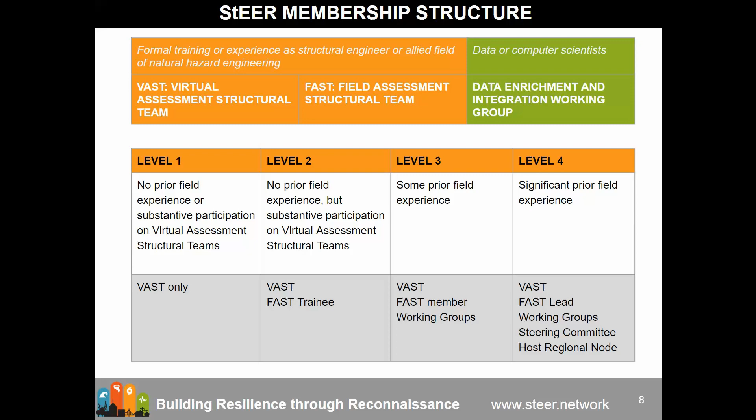Now, to help these individuals operating at the various levels - and our focus in this webinar is on the field assessment structural teams, which are primarily level 3 and 4 STEER members with an occasional level 2 as a trainee.

What we've done is create a STEER Google Drive. This is a type of shared drive in the Google context. You'll see it in your Google Drive on the left-hand side - there'll be a list of folder structures, and you'll see one called shared drives. This is distinctive from 'shared with me.' Look for shared drives, and under that you'll find the STEER members drive that you've all been added to, if you're a STEER member.

STEER members have all been asked to review the member guidelines - that's our first and primary guiding document. If you're going to be deploying in a field assessment structural team, we've also circulated and archived in this drive the Field Assessment Structural Team Handbook. We encourage everyone to take a look at that handbook and familiarize themselves with it.

We, for example, provided all of you with a badge upon enrollment that can be used as a credential. We have an access letter that can help you secure access to restricted areas during your deployment. We ask that every FAST submit a daily summary each night of their activities, so we have a template for that. We also have the FAA request form for those engaging in UAVs during their mission.

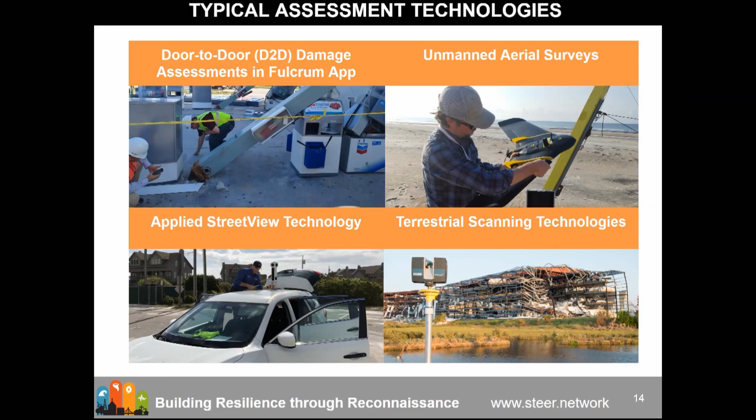So with that, I will pass it off to David, and he will go into further detail on several other of these data acquisition equipment. All right, thank you.

So now let's get into some of the details here of practically what this actually looks like when we deploy. I'm going to focus here mostly on the door-to-door assessments, because that still is the core of much of what we do in these deployments.

And so it begins with a data collection strategy. How do we decide, particularly with an event like a hurricane that impacts a large area, where we are actually going to deploy? When you think about it, we really only are able to sample a very small part of what is actually impacted, so it's critical that we collect what we focus on as representative samples.

We are not here to damage hunt or simply find the worst damage we can see. We want to take a scientific approach and take representative samples across both the hazard intensity gradient, but also capture a representative sample of different structure types - new versus old construction - to broadly characterize structural performance. This is not a hypothesis-driven approach; we're trying to broadly characterize performance, not just damage.

We do this, for example, in this case for Hurricane Florence. As it was coming ashore, after it was coming ashore, we're identifying these target areas for UAV deployment, as well as door-to-door assessments and other technologies.

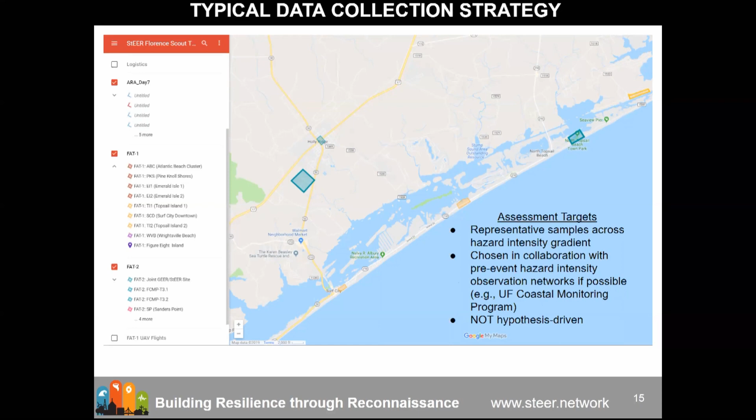Once we selected a site, we use what we typically call a cluster-based sampling technique, where the cluster may be a neighborhood, a transect through a tornado path, anything like that. And we use a redundant data collection strategy, meaning we typically try to have more than one technology available at a given site.

For example, as you see laid out here, this is in Hurricane Michael. For this neighborhood, which was a mix of newer and older homes, we were doing door-to-door assessments, as you can see with the individual markers, forensically investigating these individual structures, spending time capturing the details that we'll go over in just a little bit.

But then we were also using the UAV to capture aerial and oblique imagery from all different angles, and we also used the street view camera to go up and down these streets to capture essentially the complete ground view as much as possible from the road. The whole idea here is that we want to allow you, the door-to-door teams on the ground with expertise in structures and hazards, to really do what you do best.

That allows us to focus on forensic assessments and not have to worry about collecting every detail of every single building, but instead rely upon the street view camera and UAV data to capture some of the context for the more detailed assessments we do. We typically sample every third or so structure within a given cluster.

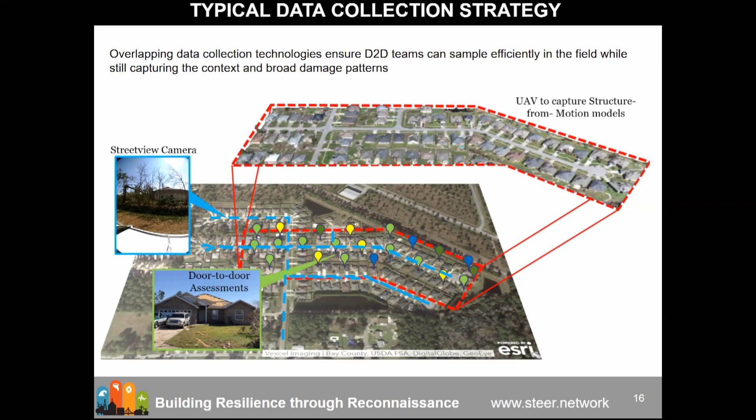That brings us to how we actually conduct these door-to-door assessments. We currently use the FULCRUM app, which is a platform consisting of both a smartphone app and a web-based platform. Within this platform we're able to develop multiple apps. Just to be clear on terminology, there's a FULCRUM app you download to your phone, and hopefully you've all got an invite and been able to do that. But within that app, there are also multiple separate apps or assessment forms we've built out and customized for our application. You'll see on the right a couple of these.

Right now for windstorms, our main form is the StEER Building US Windstorm assessment. This is focused on building performance in the US, including structural systems and envelopes, and impacts of wind, surge, rainwater, etc. We also have a non-building structure assessment form that's more general, capturing things like dams, bridges, or power infrastructure. We're still a work in progress building out additional apps. The idea is that it's not possible to capture every combination of every building and structure, but we want to provide standardized forms that capture the primary fields and characteristics of common building types and non-building structure types, to guide you in the assessment process and make sure we're collecting complete and informed data sets.

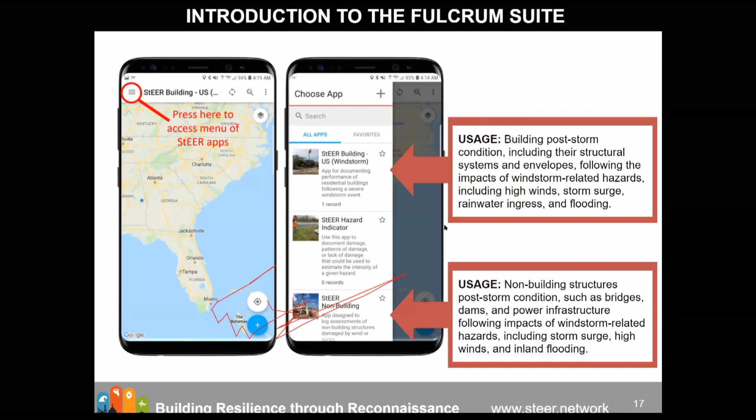Let's see, I just gave you control, so try to click—this might make it easier for you. Is it working? It looks like I can. Oh, you can draw only? All right, then I'll continue. I'll abort control. Okay, down there where all the red squiggly lines are. Yes exactly, let me move us forward. Thank you, that's still there. Don't know how to get rid of that. I'm not seeing it either, so we may just have to continue on for now. I'll let you work on that in the background, I'll just keep going.

So there you go. Once you create a record, you get a series of fields that look somewhat like this. The very first thing I want to point out is that one of the most important parts of creating the record is making sure it's geolocated correctly. This makes the VAST member's job infinitely easier if you geolocate the record properly.

By default in FULCRUM, when you create a new record, it assigns a location to that record right where you're standing. But if you're standing in the road, it's somewhat ambiguous which structure you're actually referring to. So what you need to do when you create a record is go to the crosshairs icon—either at the top in Android or at the bottom in Apple—and that brings up a map like shown on the right. You can scroll that map so the crosshairs are located directly over the structure you are investigating.

And that will help also in geocoding the address that goes along with it as well. Okay, so that's the first step. Once you've done that, it brings up a series of fields that you're prompted to fill out.

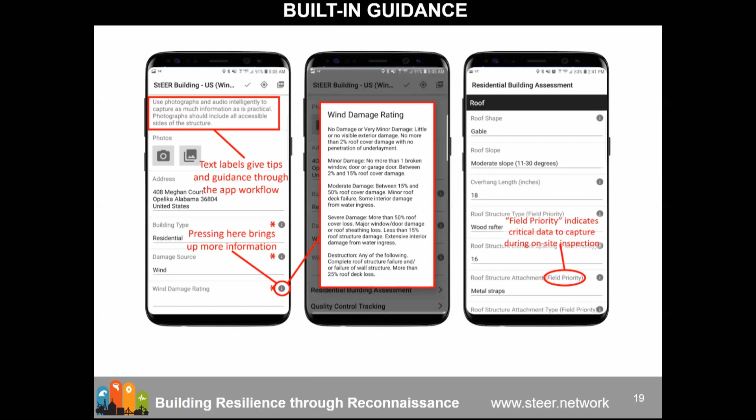Go ahead and next. All right, let me give you a general overview of the StEER non-building U.S. Windstorm app. It's going to ask for some basic information: the name of the investigator, what day, the assessment type, whether you're on site or just doing a drive-by, et cetera. An overall damage state, the source of the damage, whether it's wind, surge, et cetera. And it gives the opportunity to attach different media, so photos or audio and so on.

I'd like to point out that while each individual record you create in FULCRUM is geolocated, every picture you take is also geolocated individually. So you maintain all of that within one geolocated record.

Beyond that, you have conditional sections depending on whether it's a bridge, a dam, power infrastructure, or just a general non-building structure type. This gives some basic fields for you to fill out the main information about it. For non-buildings, the forms are less detailed because they tend to be more broad and aren't as well suited for the detail we're able to get with typical buildings. And lastly, you'll see a quality control tracking, which is used for the VAST members to help track what stage of the quality control process it's been through.

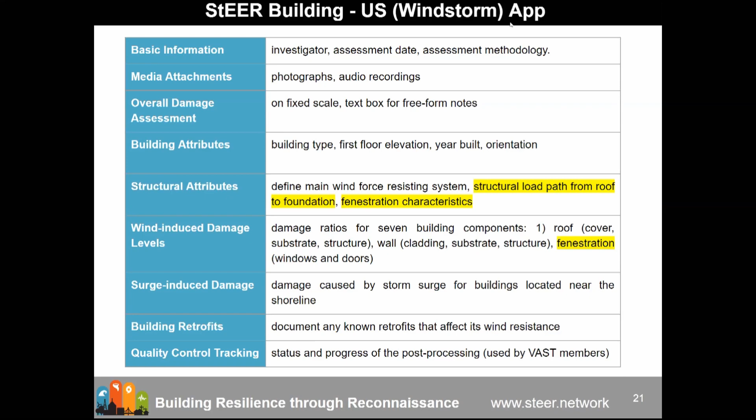All right, so that brings us to the Windstorm app, which is really the main part of these assessments. There are almost 100 fields in this app. As you go through, if you're a metal building expert, or a single family home expert, and so on, you'll see that even with these 100 fields, it doesn't capture every single possible combination and option. And that's intentional.

We can't. What we're trying to provide here is the basic details for the most common types of structures, and provide a standardized way of assessing and guiding you through that process so that we have informed and standardized data sets coming out of it. So while there's 100 fields, a lot of these are ones you're not going to be worrying about while in the field. They're things that require supplemental data sources, for example property appraiser records, to be able to fill out.

So you see the basic information and the same media attachments, the overall damage assessment. Then you get the building attributes, general characteristics of the building. Then you get to the structural attributes, which really focuses on the structural load path. And again, that's our emphasis here. At the end of the day, most of us are associated with structural engineering or hazards engineering, and we want to define what that load path is from the roof to the foundation.

And then the second aspect of that, which may not be as obvious, is characterizing the fenestration, the openings into the building. For windstorms, openings are critical to determining the loads that were acting on the structure.

And help explaining why the building performed as it did. That's a critical aspect of these structural attributes as well.

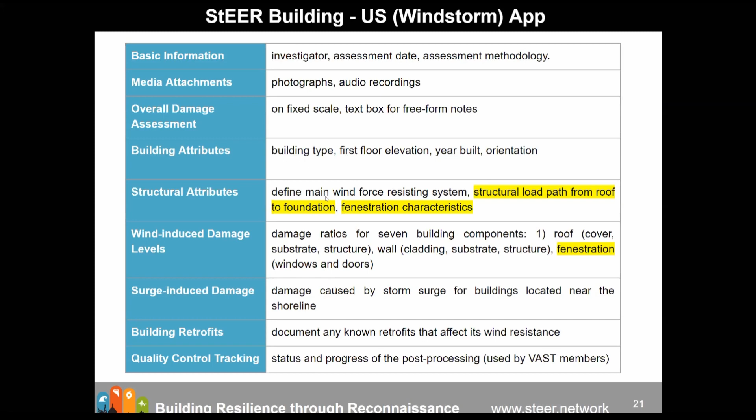All right, so very quickly let me walk through the wind damage states. For wind damage, we use essentially the damage states that are the basis used in HAZUS for the hurricane model, and these were developed and put forth in Vickery et al. in 2006. These are primarily geared towards residential structures, as you'll see reflected here, but they are generally applicable to other building types as well.

The key point here is notice we have these different gray boxes. You'll essentially go through and see the different components represented here: the roof or wall cover, window or door, roof or wall substrate, roof structure, and wall structure. The idea is that, for example, if you have roof cover damage between 2 and 15%, you're in minor damage as long as you don't have any other structural damage.

The gray indicates that for it to be in that given damage state, from no damage up to destroyed, it has to meet at least the criteria in one of the grayed out, gray-filled cells. So if all you see is roof cover damage, for example, you can't rate the damage as being destroyed. You have to have at least the majority of the windows or doors blown out, or major roof sheathing damage or structural damage. This provides some more quantitative criteria for assigning the wind damage ratings.

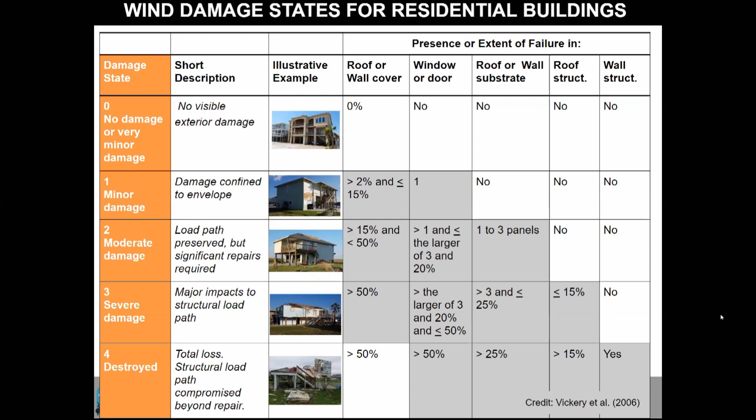All right, and then for surge, on the next one, the surge flood damage states. Notice these are a little bit more descriptive than quantitative, and this is just based off of what we have in the literature right now. This is Friedland and Levitan, 2011, progressive descriptive damage states representing surge and flood damage, everything from no damage or very minor damage all the way up to complete collapse, with intermediate, more descriptive classifications in between.

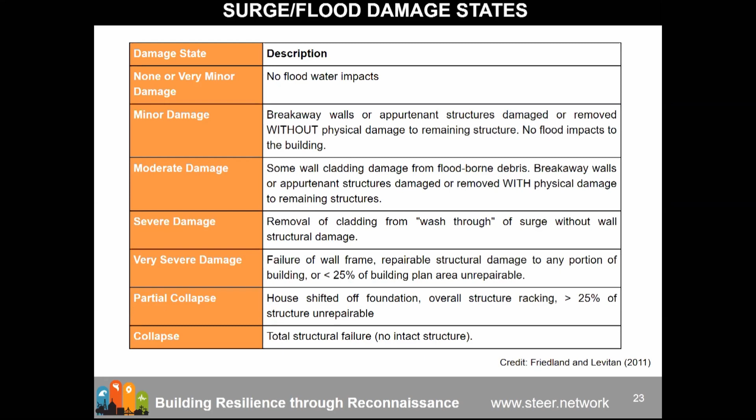And then the last one, the rainwater ingress. You may look at this and say this isn't really a structural issue, and that's true. But it's important for us, we believe, while we're out in the field, to understand that rainwater ingress does impact the community's ability and that structure's ability to function. So if we can capture information related to rainwater ingress, that's helpful as well. In a lot of cases, we may not have access to the interior, and we would just be using unknown, but if we do have access, this gives us a standardized way of quantifying rainwater ingress impacts as well.

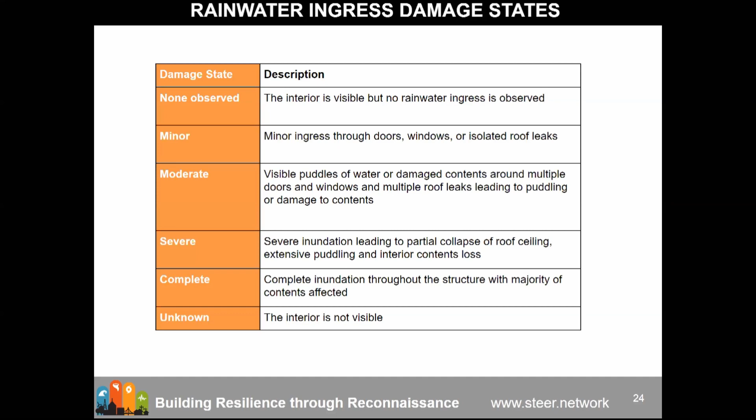Again, a key point with all of these damage scales: they're not perfect, especially for representing structural damage. But this is what's available in the literature right now, and that's actually what we want one of our working groups to start working on - the more representative overall damage states.

All right, so that brings us to these field priorities. I'm just going to briefly highlight a couple of key areas that when you're in the field, these are some things we should focus on. Again, the whole idea is that the FULCRUM app and these assessment forms are simply a tool to guide the assessment so that we can generate complete and informative data sets. You guys, you're the experts, okay?

We want you in the field being able to do detailed forensic assessments and really look at the structure and pull out what you think is important for explaining its performance. These forms simply provide a tool for standardizing and guiding you in that assessment. So you're not going to define every single field or go all 100 fields while you're on site. There's no point telling us it's a 2-story building or a gable roof, since a vast member could very easily determine that.

We also want to make sure that when we come out of the field, if all we have about the structure is just 4 pictures, well, anybody could have just taken 4 pictures. We wanted you to be able to focus on what you know best and really utilize your expertise in assessing the performance of these structures.

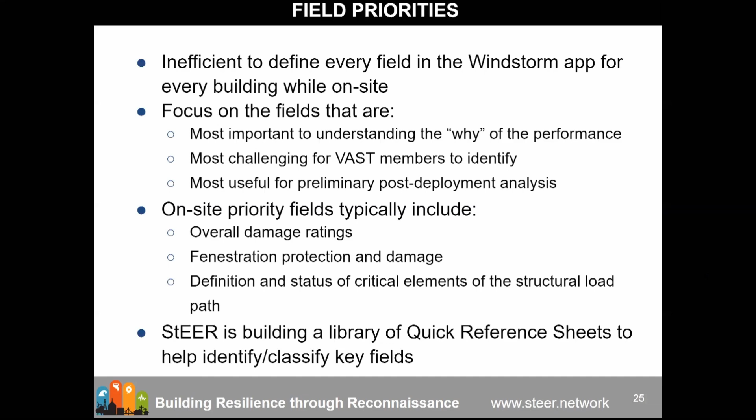This is typically going to focus on overall damage ratings, the fenestration protection and damage, and the definition and status of the critical elements of that structural load path. We're working on a library of quick reference sheets, in addition to some I'll mention today, that will help guide you in identifying and classifying these key fields.

So next, one of the important ones I mentioned is fenestration. One of the challenges associated with it - if you're familiar with wind engineering, you understand that when an opening is breached, especially on a windward wall, you can significantly increase the wind loads acting on that structure. And many times that leads to the roof load exceeding capacity, blowing off, progressive collapse from there.

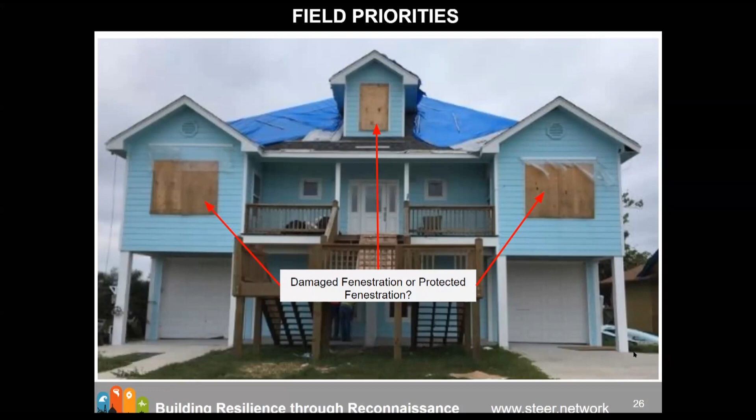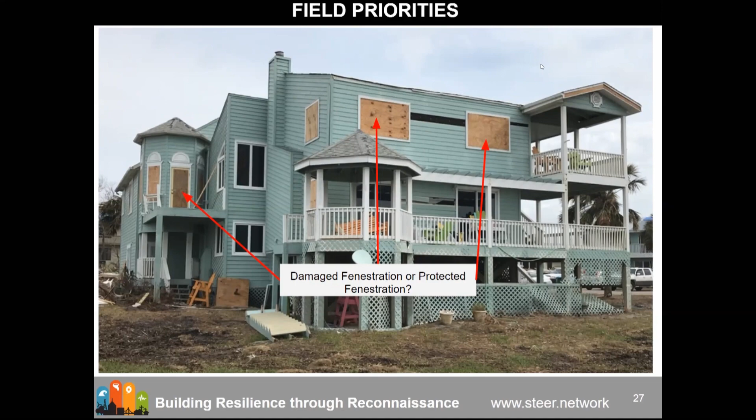On the next slide, I have another example - again here, about half of the fenestration is boarded up and half is not. It's very challenging for VAST members to then look at this and try to assign a damage ratio to fenestration. Is this 50% fenestration damaged, or were these windows protected beforehand? Maybe all of them were protected and the homeowner took some down after the event, or maybe some blew off during the event. So fenestration is critical to focus on while you're in the field.

Another example here, the same thing for hurricane shutters, this is from Hurricane Florence. On the left, you have the hurricane shutters still in place. On the right, you see the frames for the hurricane shutters are in place, but it's unclear just from the picture whether they were installed or not. So if there's any information you can get while on site - talking with a homeowner, inspecting closer to look at fastener schedules, how it was attached, or evidence of broken glass - that can help inform whether these were protected fenestration or damaged fenestration.

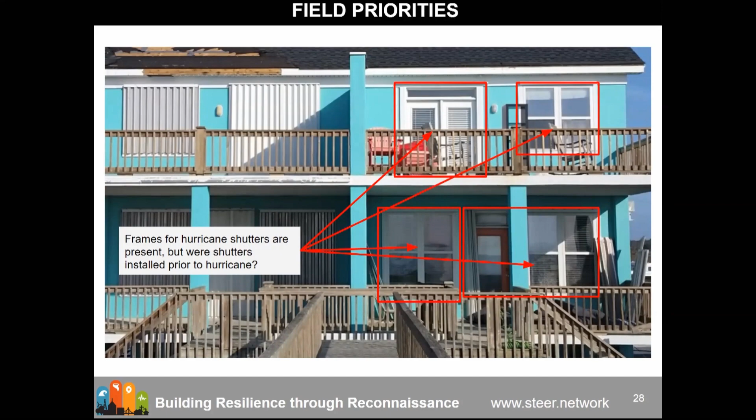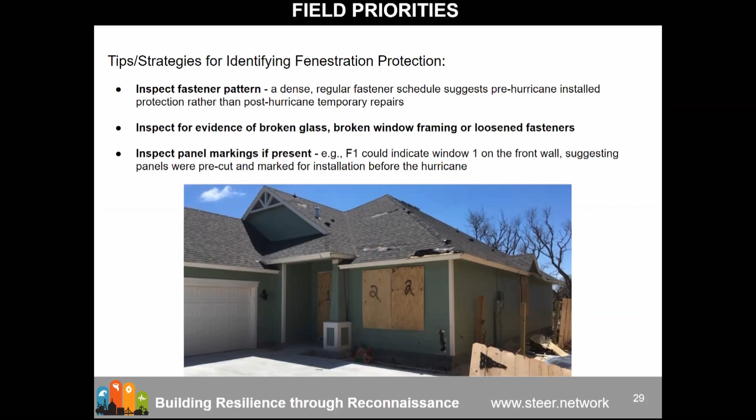So again, some tips or general strategies. First, inspect the fastener pattern if they're using plywood or OSB panels. Another is to inspect for evidence of broken glass or damaged window framing. Lastly, inspect for panel markings—like if it's numbered 1 and 2, that's generally an indication these were pre-cut panels installed before the hurricane.

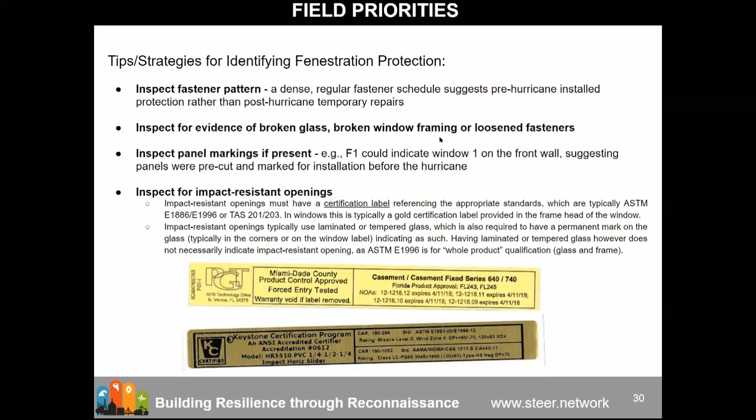Another critical aspect of the fenestration is identifying impact-resistant openings. This can be virtually impossible for a VAST member to identify whether it's impact resistant, yet it can be a critical aspect to determining the resistance of that structure. So we've provided some guidance here as well as in the FAST handbook for certain labels to look for that will help guide that process.

Related to that, one of the most helpful things you can do is, if you see any visible label related to the manufacturer, wind pressure rating, et cetera, on a garage door or other type of opening, go ahead and snap a picture of that, or write it down in your field notes. Try to capture that information critical to helping us determine the resistance of the structure.

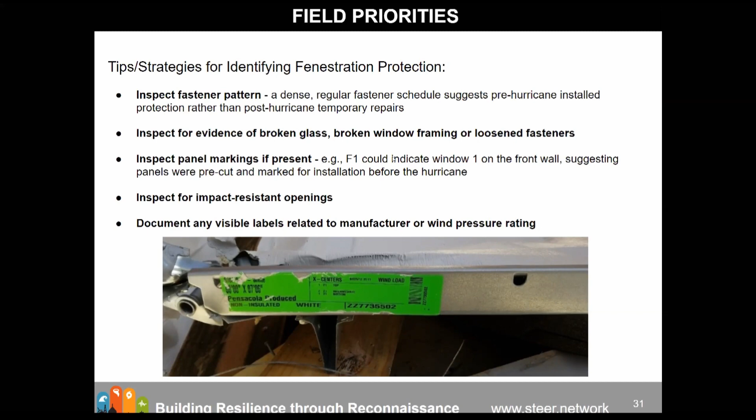Another one that may not be as intuitive is the wall cladding system. There are several cladding systems that look very much alike once installed. For example, these two pictures on the right—one is vinyl siding and one is fiber cement board. These are two different manufacturers that make these products, and understandably they're sensitive to their products being misclassified, especially when you start pointing to damage rates and failure rates.

We can sometimes get this information from public sources such as county records, but many times they don't include it, and it's not always precise. It's also difficult many times to identify from photographs alone. We've developed some ways to help, but the best case is if you're on site, go ahead and fill in that field—identify things like whether it's wind-rated vinyl siding or standard siding. Capturing a manufacturer's label on damaged products is very helpful.

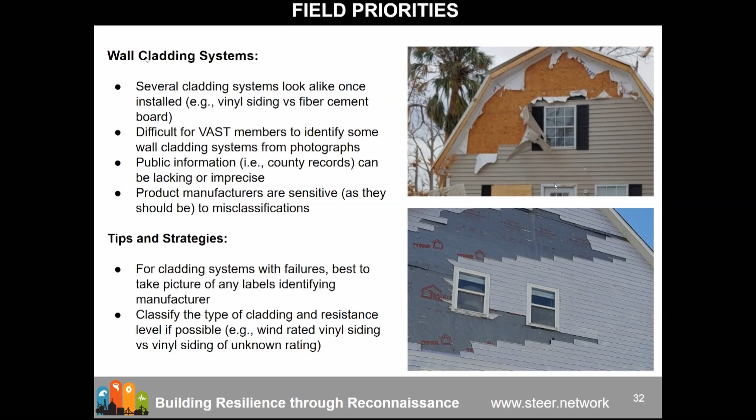Lastly, but in reality most importantly, is this idea of the load path—that chain of structural elements that transfer the loads to the foundation. In many cases, if the structural system is not really damaged, it may be difficult to determine exactly what that structural load path is. In those cases, we simply have to rely upon when it was built, whether there was a building code in force then, and try to pull out what we can from that.

If at all possible, any information you can provide about the load path helps us understand the resistance level of the structure. If you can get access to the inside of the home, if the homeowner's there, ask questions—even identifying whether it's wood frame versus concrete block, or braced frame versus moment frame steel building, et cetera. Things like that are critical to helping us classify these structures. Many of you on this call are good at assessing the structural load path of buildings, and we want you to focus on that while you're in the field and make it a priority.

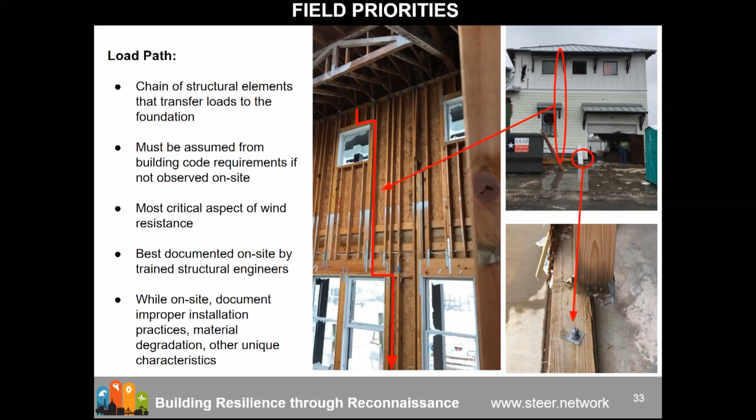This is just a snapshot of a couple of things we've found in our deployments so far to be most helpful. There are many more case studies and examples like this we're working on and trying to put together, and we welcome any suggestions from you all of things to include or better ways to identify different products or systems while on site.